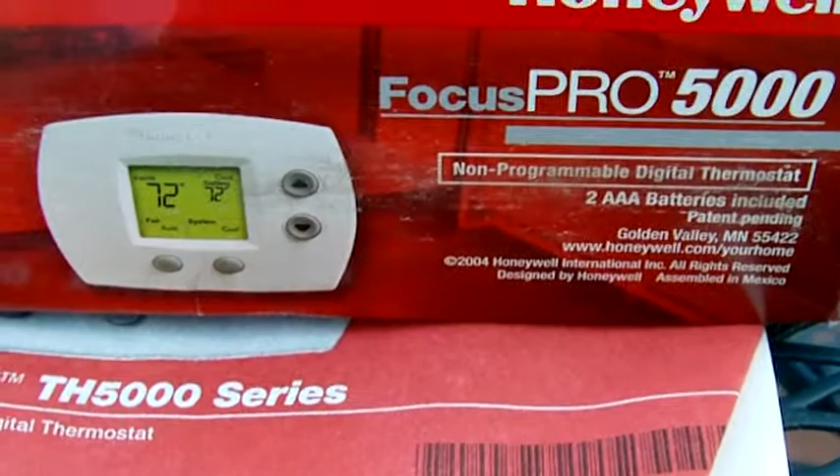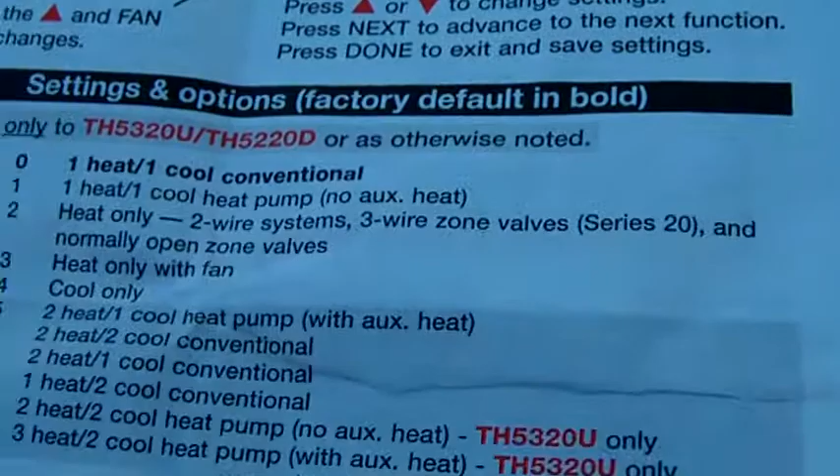I got a couple of emails, a couple of guys told me to show you, get some more information about this. Everything's in the book, you just gotta take your time. Don't rush, read the book. You read the instructions and it will tell you everything. And a lot of people are gonna say, what's the guy talking about, I already know that stuff, I already know that stuff.

Well, you probably know, but some people up there, at the beginning, like me, we're just starting, so they're not too, they're not quite familiar. The reason I use this model is because it's simple, but I know the guys up there got the big one, they got the little one, a real more complicated one. So we're gonna start with this one, then we want to work our way up, 6,000, 8,000, but I start with this one because it's pretty much basic, and it's good for the beginner over here.

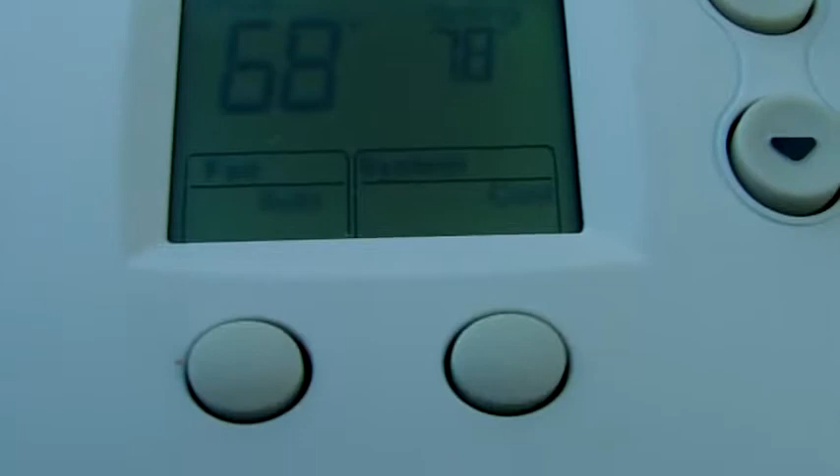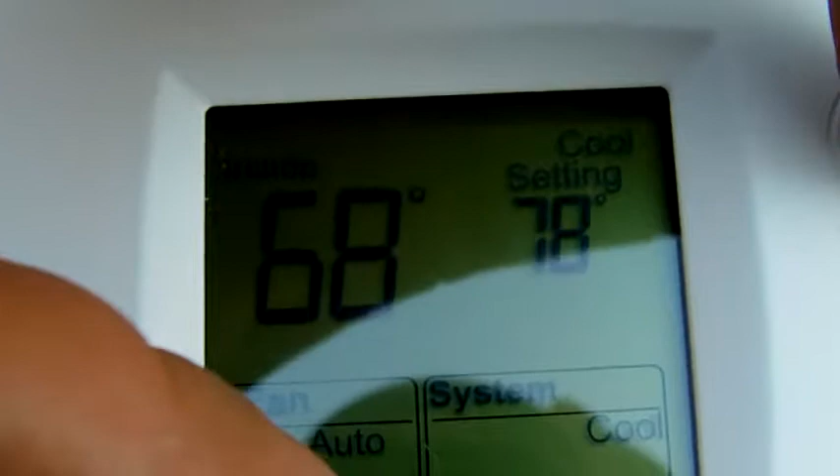Okay, remember guys, you go all the way to the mode setup mode function. Hold this for a couple of seconds. Okay, you see, that's gonna change, right?

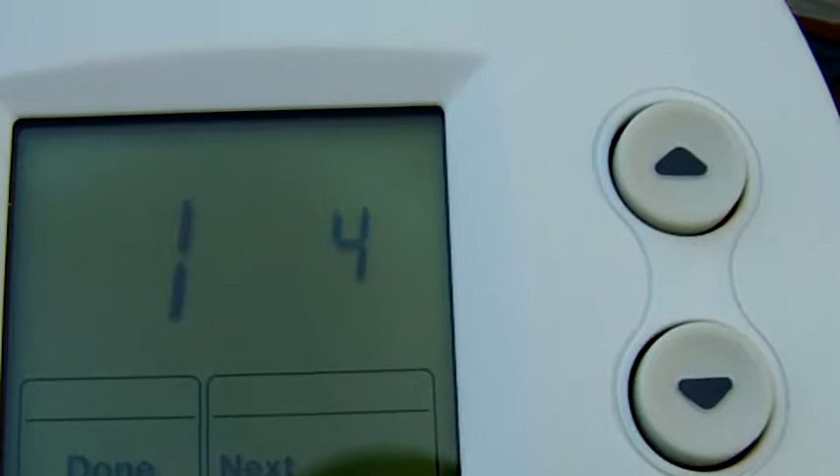Okay, it's set up to cooling right there. This thermostat is set up for cooling only. Okay, let's say you're gonna replace a T87, the round thermostat, the one I'm talking about.

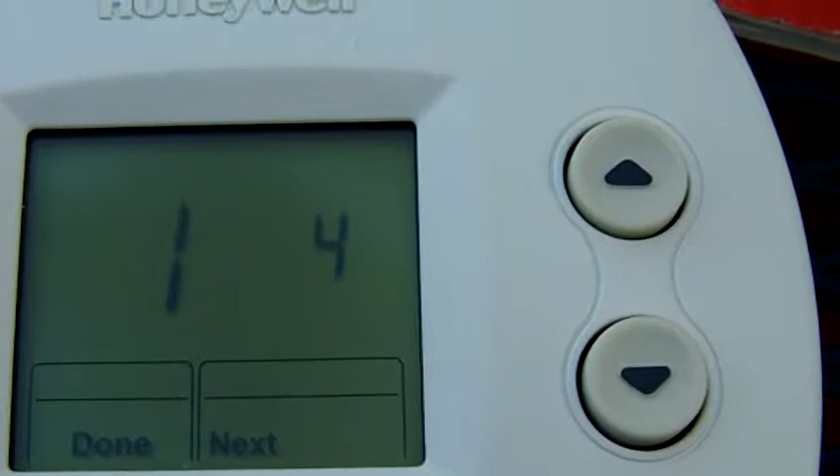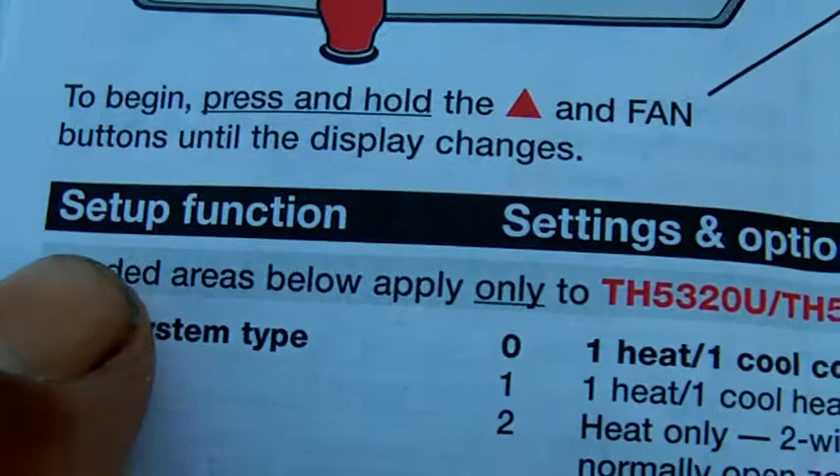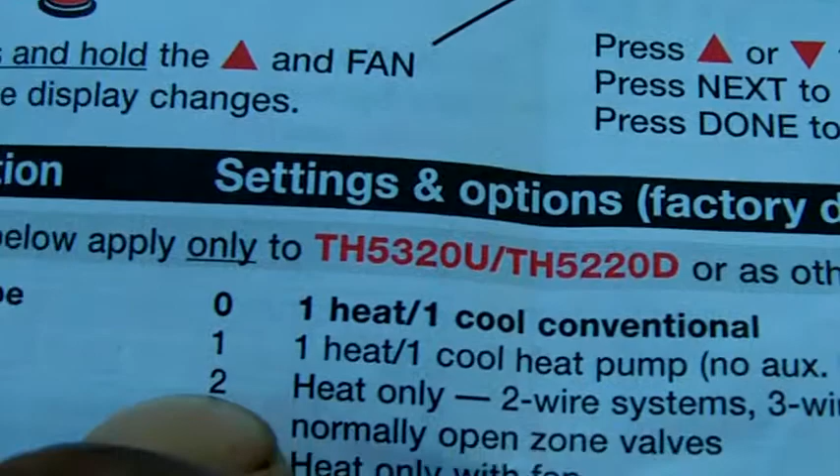You're gonna replace it, but you only need heat only with a 2-wire thermostat. Okay, heat only. So you're gonna stay over here in this same function over here. You read the instructions, same function, setup function. You're gonna stay in 1. Okay, now you want heat only, right? Setting, you're gonna go to heat only. So we need a number 2 to replace that T87, heat only.

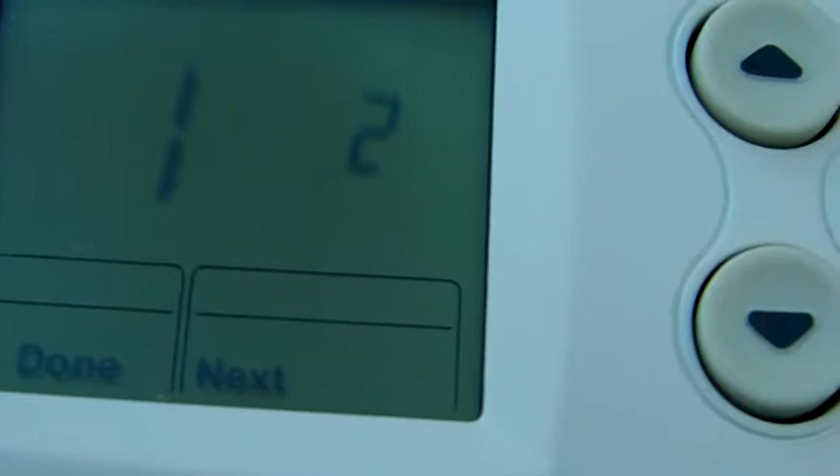So you come to this thermostat. Remember, we set up for cooling, but now we want one with heat only. So you come over here and press number 2. We'll go for number 2 right there. This thermostat now is set up to run in heat only, and you press done. When you finish, press this button over here, done. Boom, and you're done. Okay, so this thermostat right now is set up in heat only, and it's off.

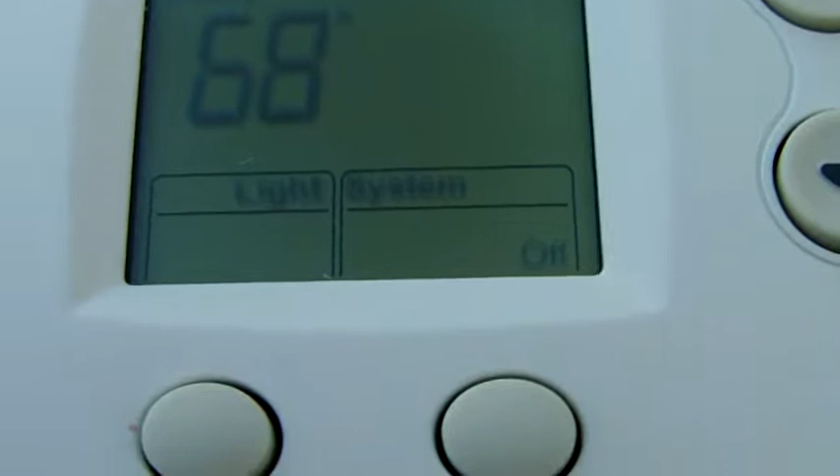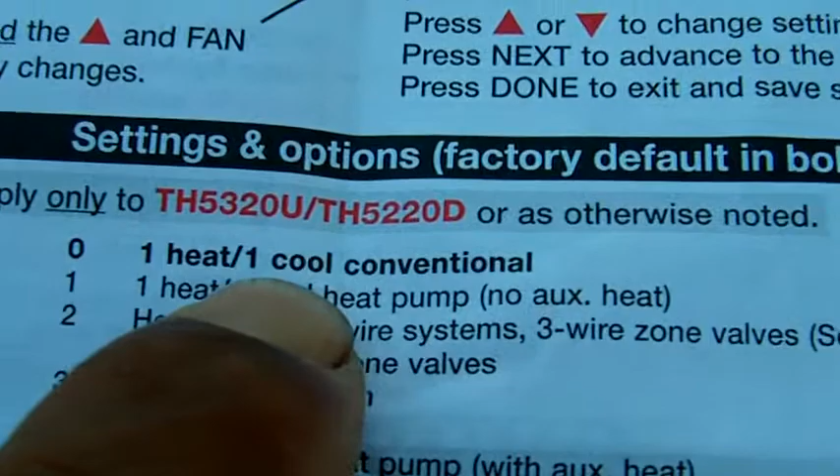Remember, this Pro 5000 is already set up from the factory to work with heat and air conditioning, heat and AC. You don't have to do nothing. It already comes that way. If you check, it's already set up to 0 over here. It comes from the factory. It's in function 1, it comes from the factory like that, to 0. So it's heat and cooling. Okay, so if you need it like that, you don't have to do nothing. It's already set up everything, okay.

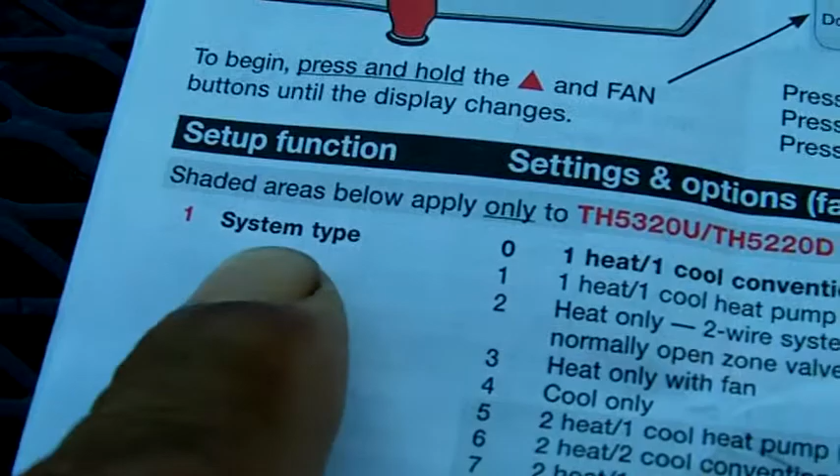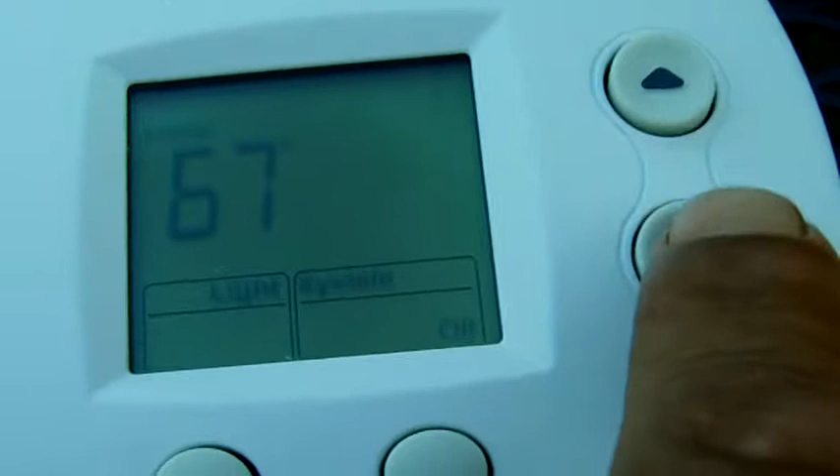Now if you got a T87, somebody only got cooling, you go over here. You put in function 1 and look for the menu on the side, I was telling you over here. This 2 button over here is for this number over here. You could play with this number, up to 4 and up.

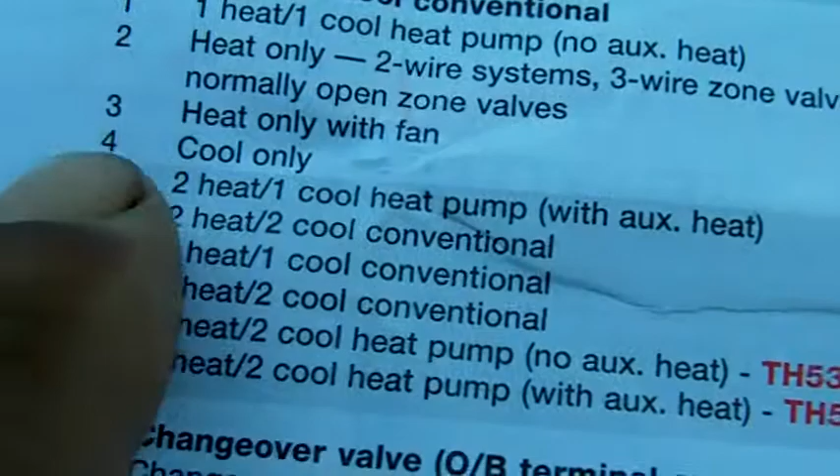This is a little shaded over here. You cannot use this function down the bottom, see, it's kind of dark. You will need a different thermostat for that. Okay, but you could play with 4 and up, all this function over here.

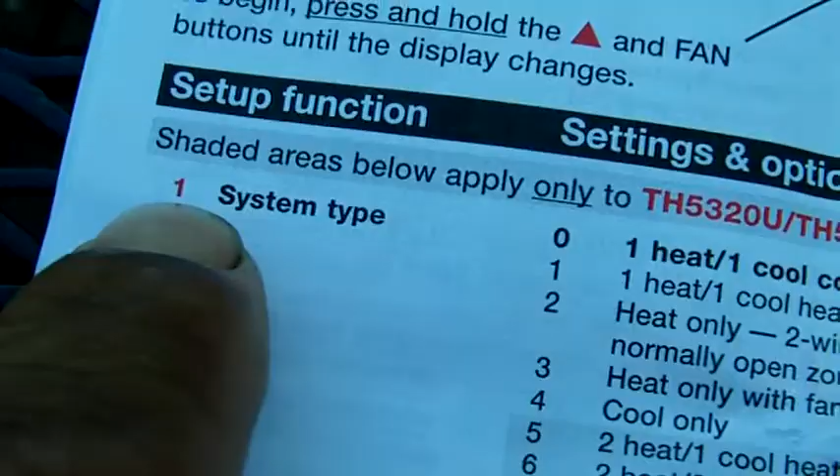Okay, the big number. Well, I'm gonna set up. Hold on, let me go back over here. Hold it down for a couple of seconds. Boom. Again, go over here, big number again, so over here. And the little number, all this over here.

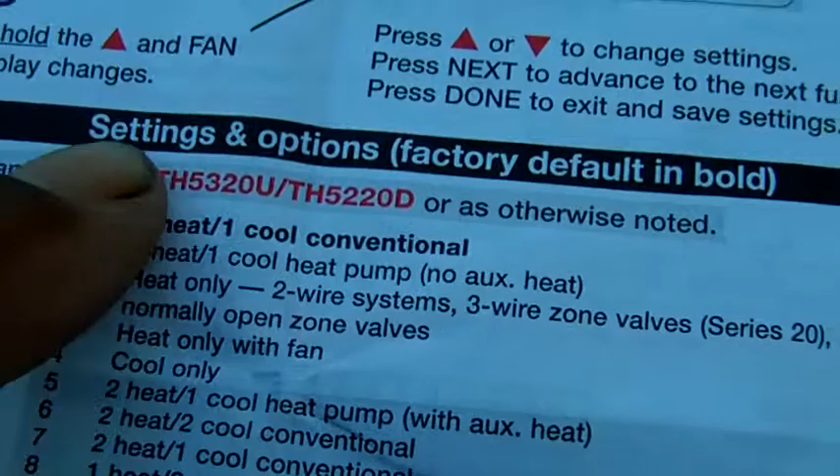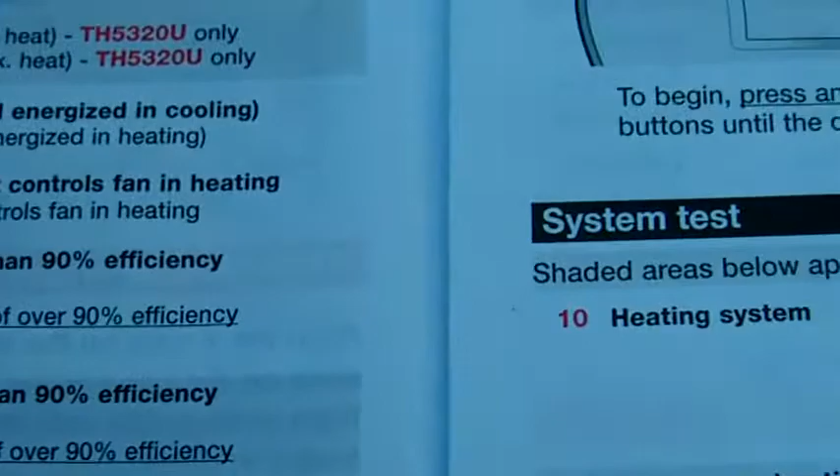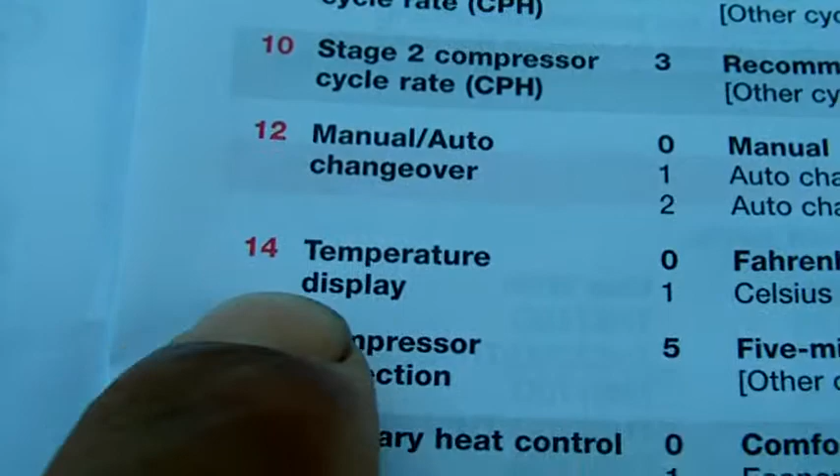Okay, and you got all this menu over here, stuff you could do with this thermostat. Remember the video before? Fahrenheit, Celsius. You need 14, and you go to the side and find out if you're set in Fahrenheit or Celsius.

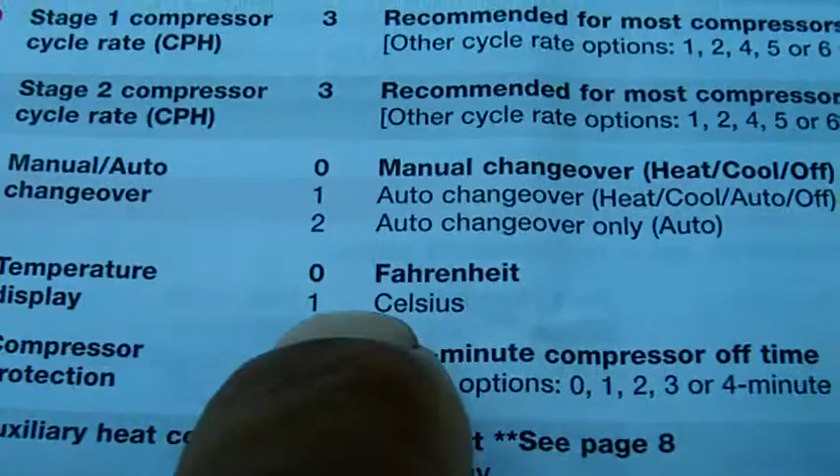I went to a house, to a call, where somebody was playing with this, and they had it in Celsius. So I fixed that, that was a call, that was an easy one, in and out.

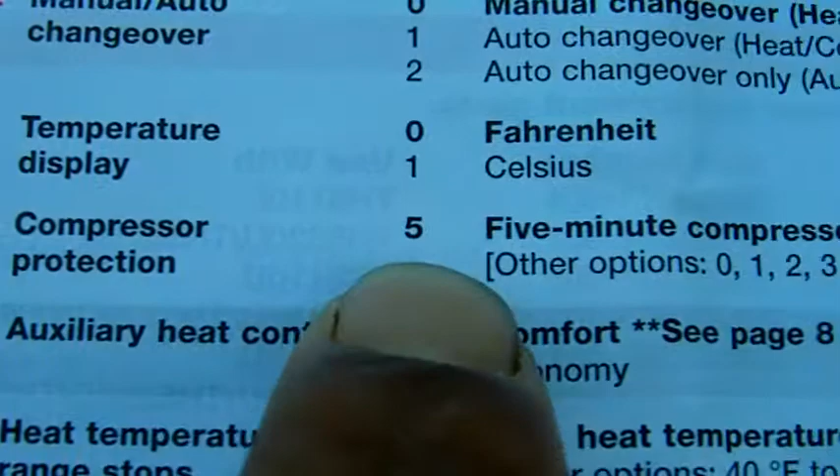Okay, now remember the video before, I used the 15, and I set up the compressor delay. Okay, time off, you see it. You can set them up to 4 minutes. Right one, what do you want to do? Okay.

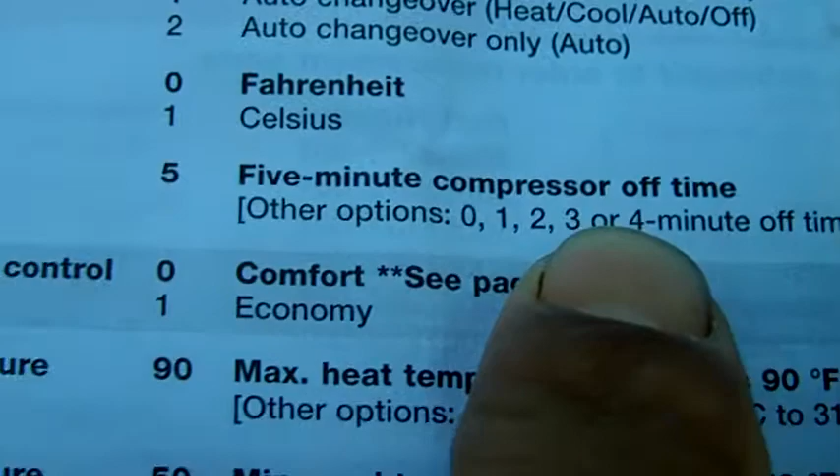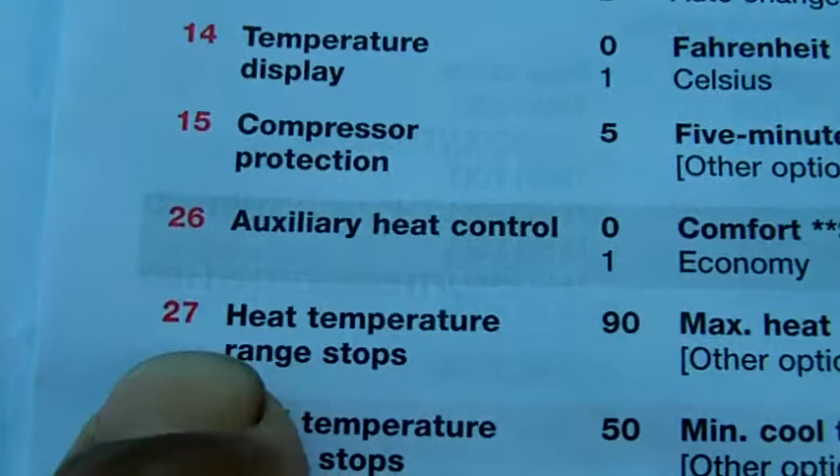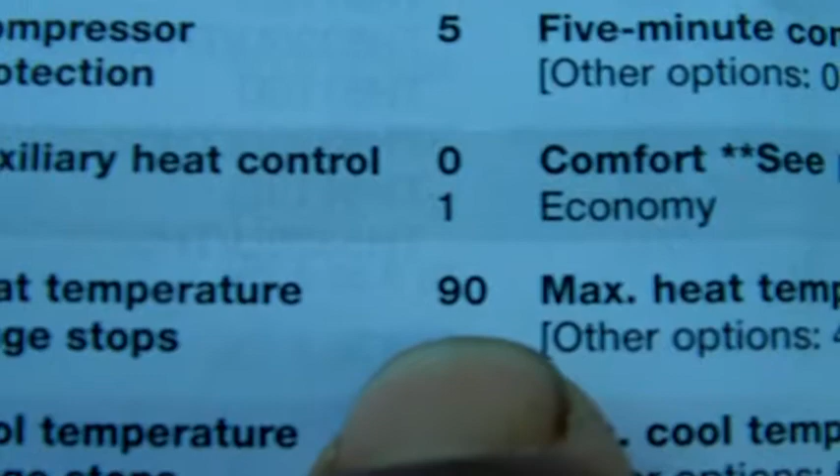Over here, remember we were playing with this before too, 27, big number, 27, heat temperature range stops, look. Right, you go to that menu, 90, and you set up the temperature. You want nobody to play with the thermostat, you set them up, you lock it in.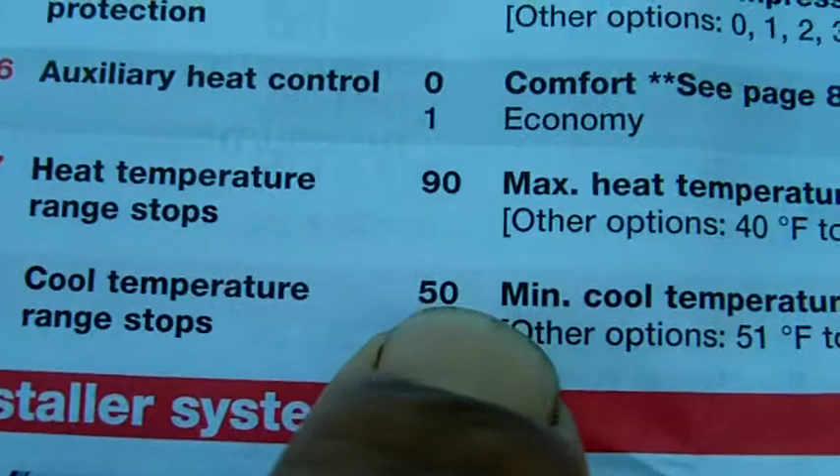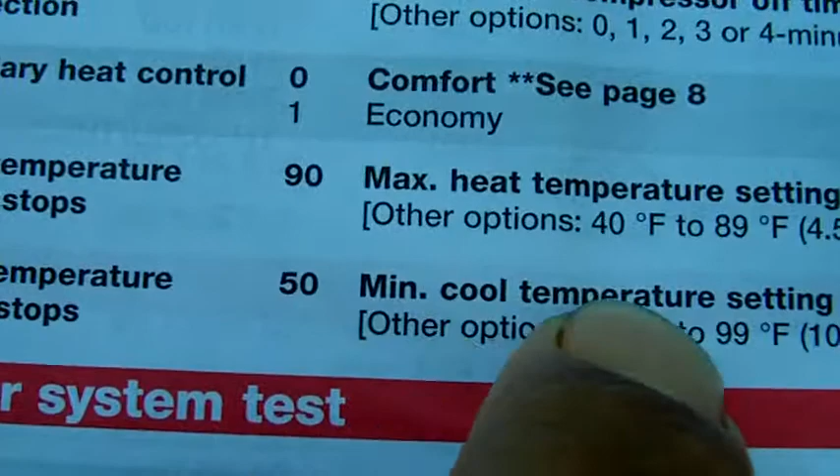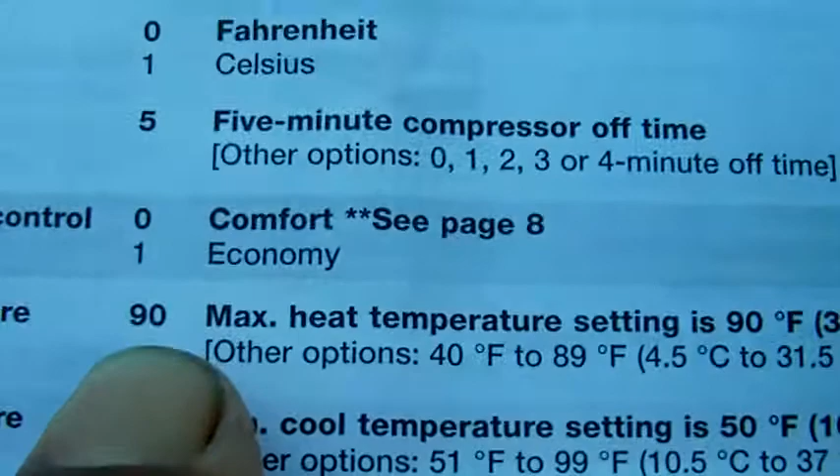Same thing with the cooling, you go to 50, means the function 28. 50 is the minimum, the maximum is 90, and 50 is the minimum. Okay, so you set them up. And in heat mode, you could set them up way up to 90. But who wants the temperature in the winter at 90 degrees in the house? Nobody. But some people, believe it or not, I've been to some houses where they use 85, close to 90. It's crazy, but...